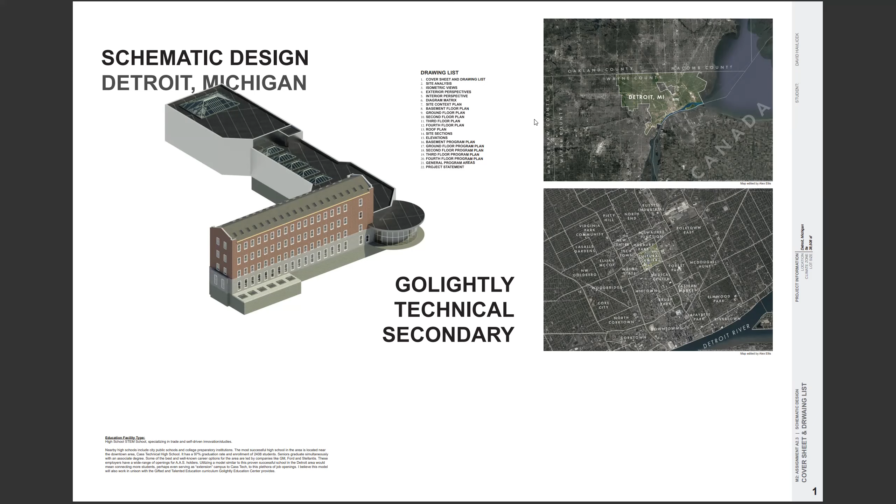Site analysis: on the left we have diagrams that I helped create for a group project, and I also took important weather information created by Alex Ellis from our group. I have vegetation - there's quite a bit. It's a residential neighborhood, so pedestrian access was one of the main factors going into the site. Also the sensory plan - the big thing I want to point out is the automotive noise. There's an interchange and busy roads right around the east and northern parts of the site.

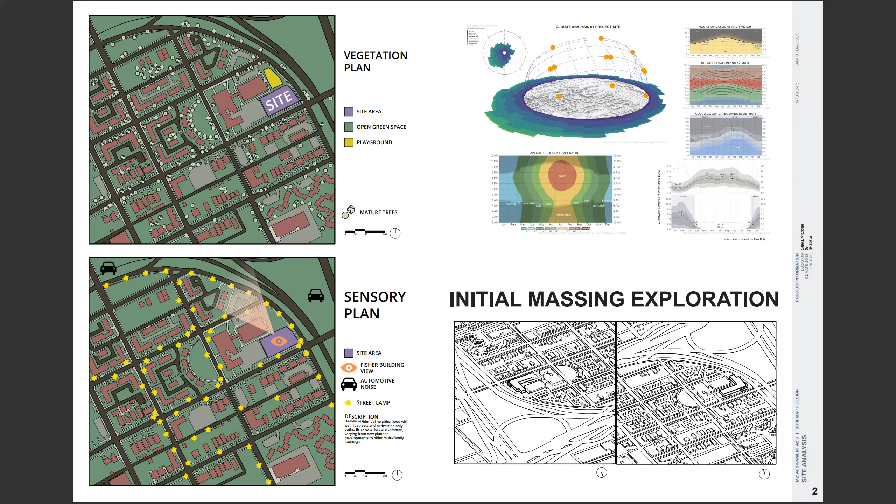Part of the massing, the L shape, was a suggestion from my instructor as an attempt to create naturally a green space sheltered from the noise in the courtyard. Looking further into this design, there's a west wing that is more historical to match the neighborhood context, and also to hold and shelter the more traditional learning units. There's also a more modern northern wing for the collective clear span spaces.

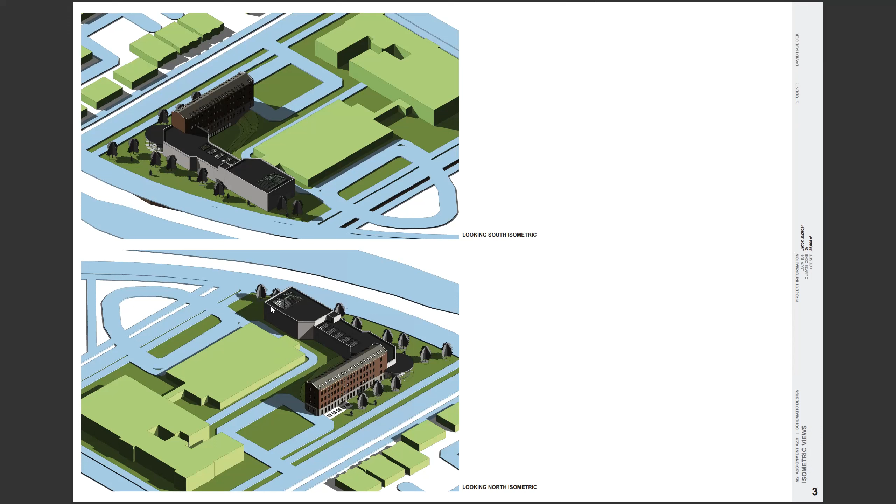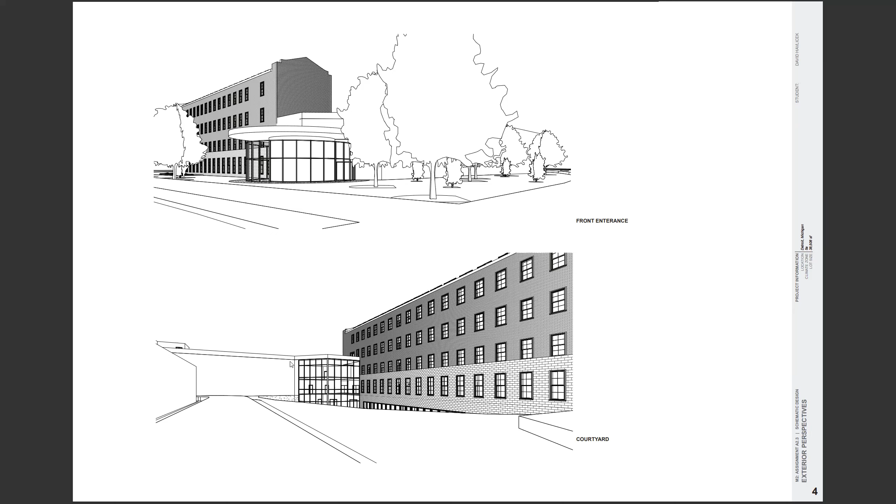From the front entrance, and also from the courtyard, you can see both of these different architectural styles coming together in the core of the building, both from the outer and inner views, in the interior atrium - that core part of the building. All right, natural light.

This is a section through the West Wing, the Tudor style, more traditional part of the building. One of the reasons it's so narrow is to bring in a lot of natural light and to expand the green space on the inner courtyard. All of these learning units, traditional classroom setups mostly, are getting tons of natural light, including this library, which comes out a little bit to bring in some light into that larger space.

The structural plan is set up very efficiently, 30-foot intervals, 20 feet this way, and the 30-foot intervals perfectly match up with this narrow Tudor style of the building, because these are load-bearing walls. I hope to do wood rafters and trusses for the floors, just clear span all the way to both of the load-bearing walls. Site strategy - I'm going to focus on this more than the site plan.

I've expanded the integrated bus drop-off area, or the existing bus drop-off area. It's integrated, with proposed parking and then the garage access. This garage is for learning use - it is for automotive learning. So there needs to be a way for vehicles to get in there, but also for some instructors.

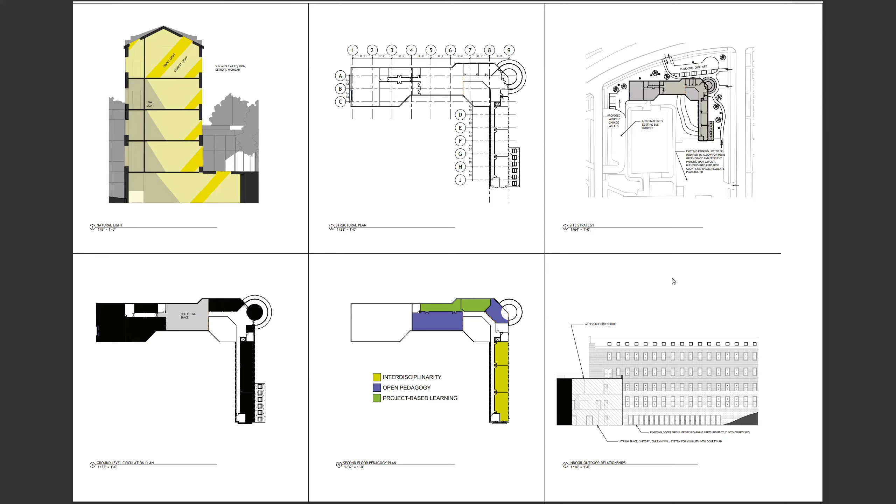On the main floor, we have a lot of support spaces - staff administration, and also the cafeteria, some more collective space, but then service and kitchen. There's the garage, which is automotive, a technical learning environment, but the garage matches very much the more industrial support nature of the service and kitchen.

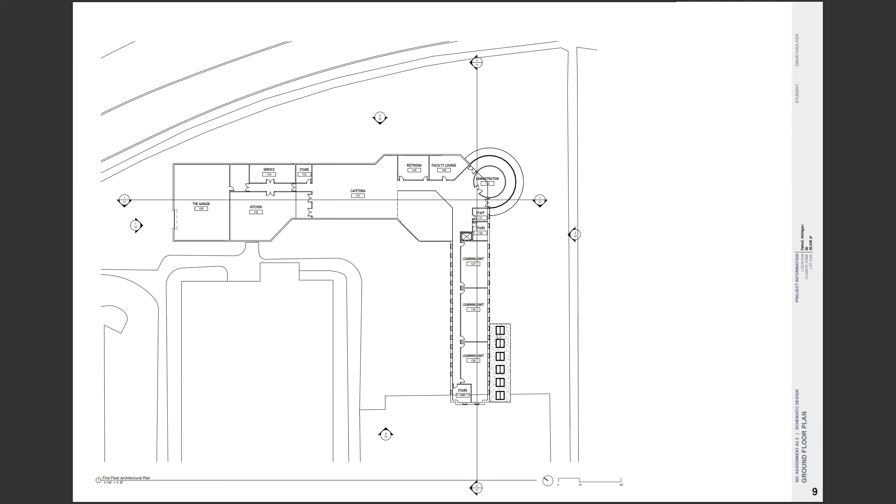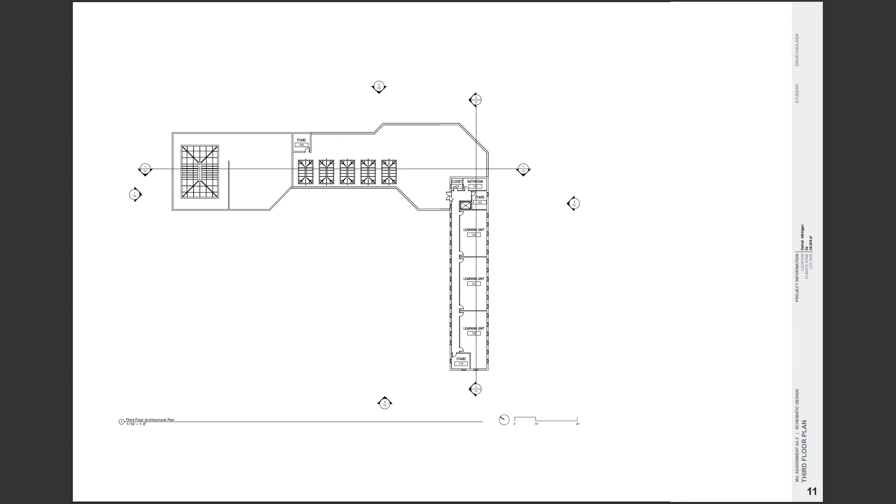Now here you see the learning unit layout in the more traditional Tudor style West Wing, and that same style is matched as we keep going up, and it will remain the same because it's about as efficient as I could get it. The learning units and laboratory spaces are further expanded up here, and then the green roof is now going to be visible on the 3rd floor. It's perfectly level with the 3rd level of learning units on the West Wing, so they can have great access to the green roof even on the 3rd level.

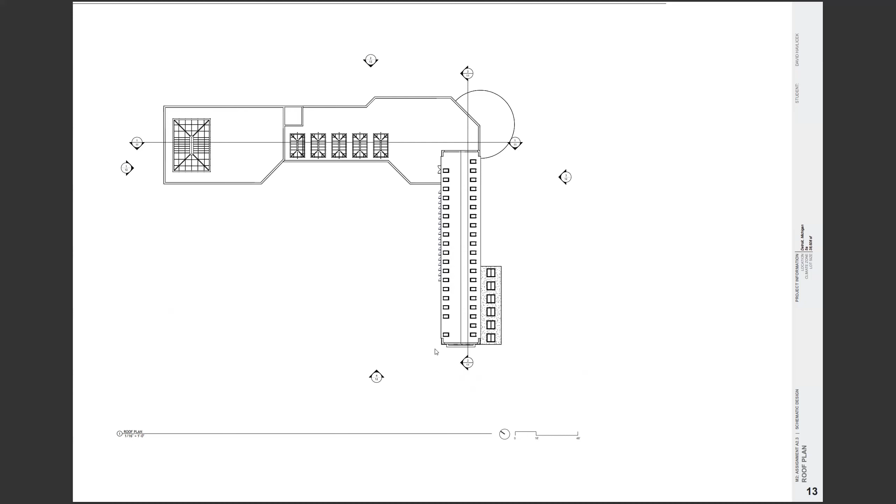The 4th level, despite having not much around it and having to go up 4 flights of stairs, sounds kind of dreadful, but has great light access. 4 floors is about as high as I think I could go reasonably without getting students mad. I've heard of a student who had to go to a school in downtown Twin Cities that was like a 9-story school, and it was just terrible. I couldn't imagine. So 4 stories with great light, as shown in the diagram before.

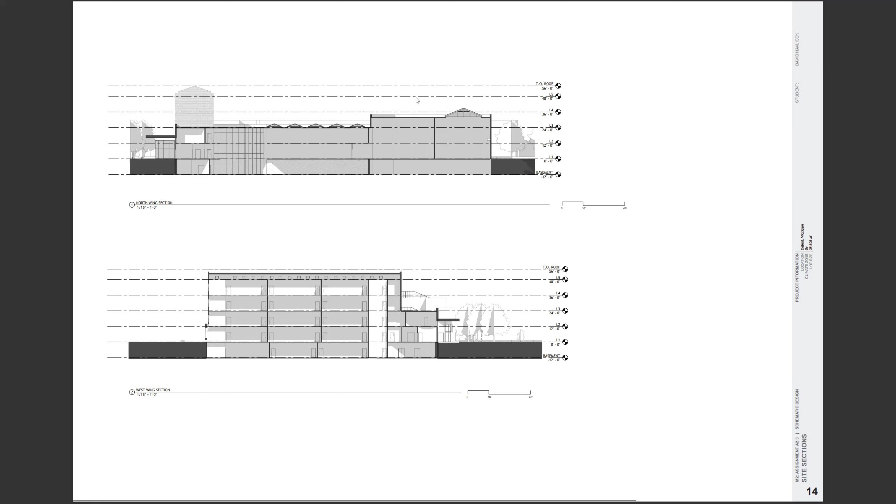All right, some sections from both wings. We have efficient classroom style, traditional classrooms set up on the West Wing, and the North Wing much more clear span, laboratory, open pedagogy, self-led, self-driven studies.